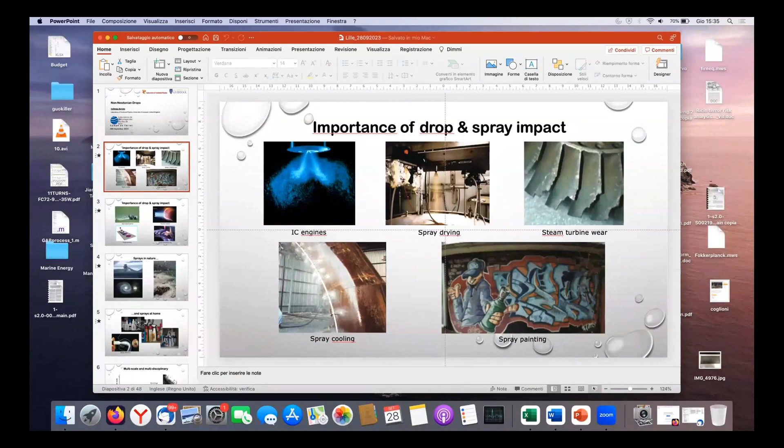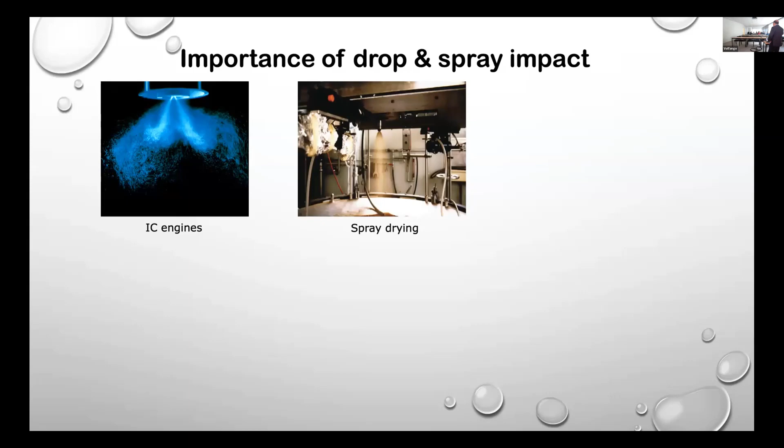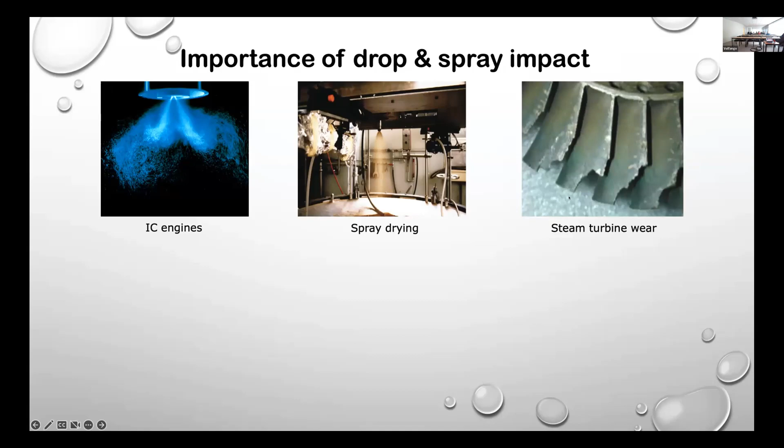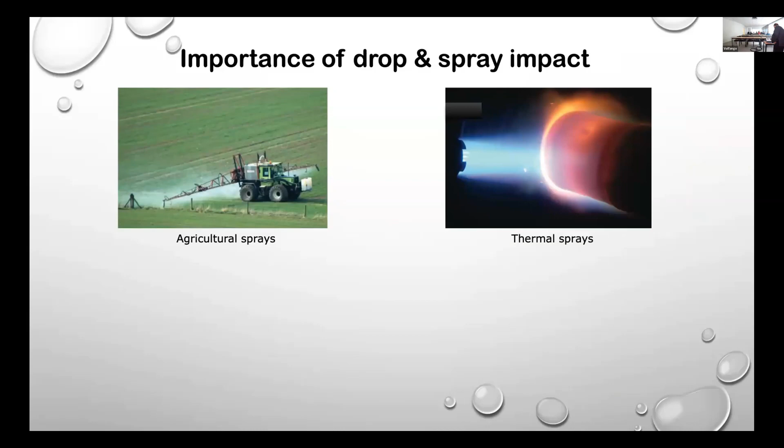That's okay, so to repeat: drops and sprays are important in our everyday life. We have internal combustion engines. Food, most of the processed food, at some point in the production process involves spray drying to make powders. If you know a bit about turbo machinery, this is the effect of droplets impinging on the blades of a steam turbine. We have spray cooling, spray painting, more or less desirable. Sprays are extremely important in agriculture for the distribution of agrochemicals on crops. We have thermal sprays, and of course we all know the importance of inkjet printing and inkjet manufacturing today.

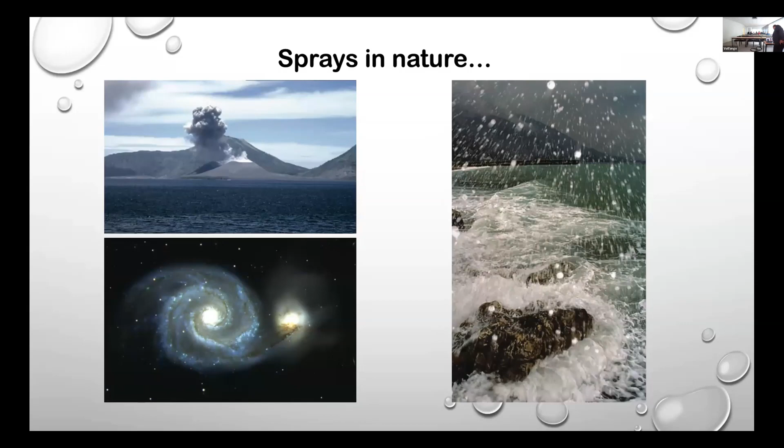Sprays are common in nature. Think of the eruption of a volcano, or the foam generated by waves that hit cliffs, but they are also in the universe. Very often, the dynamics of galaxies can be modeled using hydrodynamic models, and very often they release droplets as they break large amounts of cosmic matter. They become more or less like liquid jets. We have a lot of sprays at home, including medical sprays when we are sick, for drug delivery.

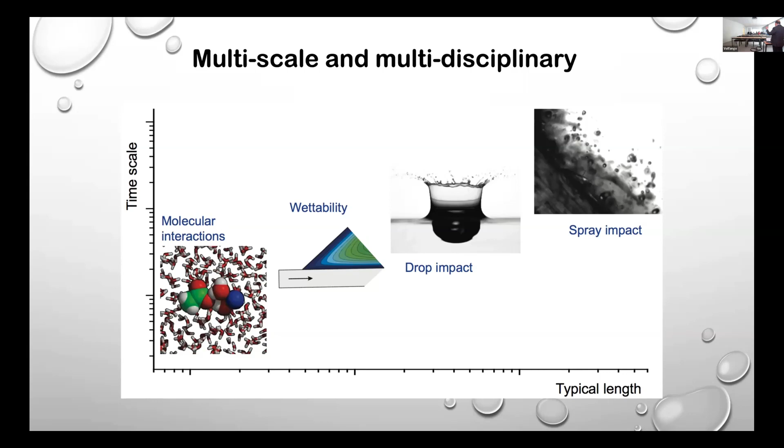One of the beauties of studying these things is that we can span over large ranges of length scales and time scales. We go from molecular dynamic simulations at molecular scales, to somewhat larger scales when we study fluid dynamic singularities, such as the problem of the contact line and the contact angle in wetting. We can go to millimetric scales and millisecond time scales when we study drop impact phenomena, and use even larger scales when we study sprays, which result from a combination of a large number of droplets.

So how about drop impact in general? Imagine a droplet that hits a solid surface, a solid target. The first thing that happens is an inertial spreading stage: the droplet, which initially is spherical, impacts the surface and spreads more or less like a disk. In reality, there is a very thin layer, called a lamella, surrounded by a toroidal rim. This stage lasts for about 5 milliseconds.

The second stage of drop impact can have different outcomes depending on the conditions, first of all, of the substrate - its roughness, wettability, porosity. The second important parameter is the impact kinetic energy, or better, the ratio between the impact kinetic energy and the surface energy, which is expressed by the Weber number.

So, roughly speaking, we can have 3 cases. One case where the droplet just sits on the surface. One case where the droplet bounces off the surface. And when the impact kinetic energy is very large compared to the surface forces, we have this case here, which is called splashing, where the droplet breaks down into smaller satellite droplets.

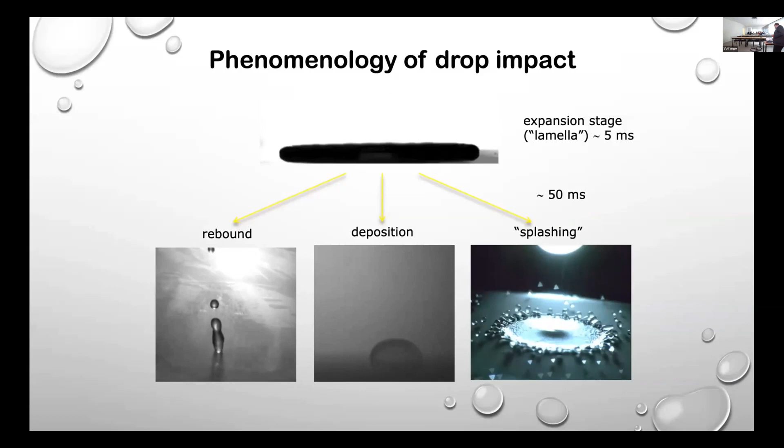How can we understand this in very simple terms? Well, the ground zero of any mathematical modeling is identifying the appropriate dimensionless numbers.

So the simplest model of drop impact can be a spring dashpot system, where the elasticity of the spring is represented by the surface tension, because as we increase the free surface, for example when the droplet spreads on the surface, we increase the surface energy, which is proportional to the area. And of course, damping, viscous dissipation, is represented by viscosity.

So if the recoil velocity is slow, the drop will just sit on the surface and take the shape of a spherical cap. If the recoil velocity is very fast, there will be enough energy for rebound, roughly speaking.

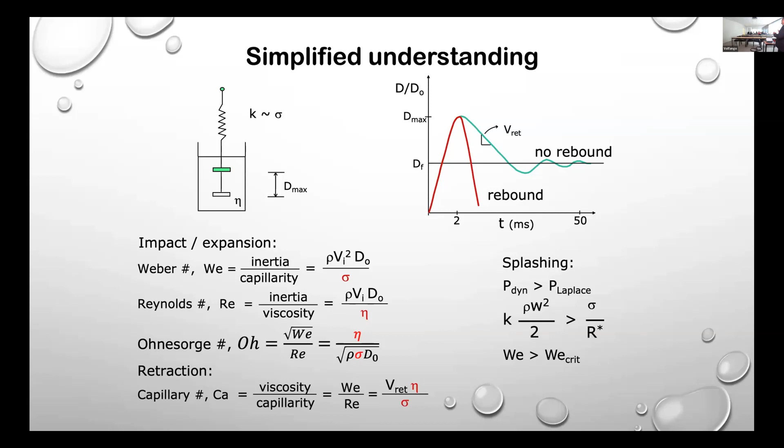We find that splashing occurs when the Weber number exceeds a critical threshold. And if you look into the literature, you will see that, with some coefficients, the correlations to determine the point of splashing are all based on the Weber number or combinations of the Weber number and the Reynolds number. So even if we use very simple tools, we can understand more or less the trends of what is going on.

There is something even more interesting when we have the impact of droplets on a heated surface. So far we have seen the three basic outcomes of drop impact: deposition, rebound, and breakup. These also happen on a heated surface, but on a heated surface there is something more.

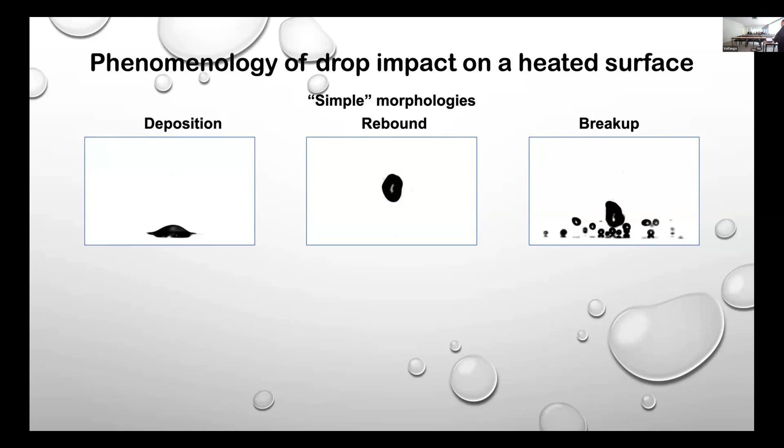Because if the surface temperature is higher than the boiling point of the fluid, we have secondary atomization. We will see in a minute where the secondary atomization comes from. However, this can be superimposed on the basic outcomes, deposition, rebound, and breakup. So we'll have deposition with secondary atomization, rebound with secondary atomization, and breakup with secondary atomization.

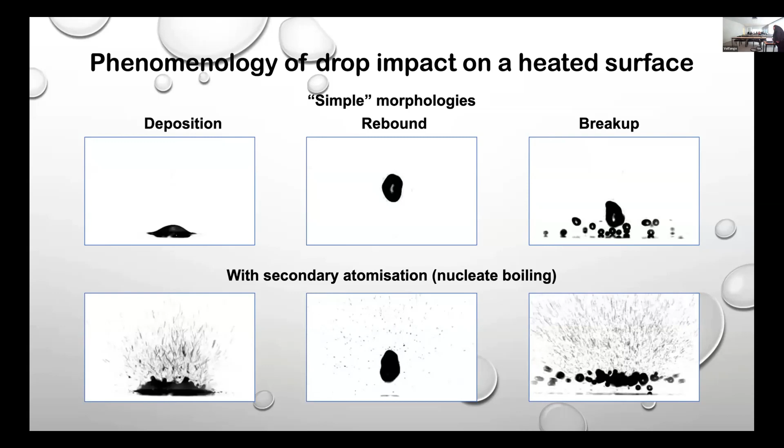Empirically, we can work out some maps that tell us where these impact outcomes happen, depending on the impact Weber number and the surface temperature. So for example, dry rebound without any secondary atomization typically happens for low Weber numbers and high temperatures, while if we go to higher Weber number, we will have drop breakup, with or without secondary atomization.

The origin of secondary atomization is essentially due to boiling, to nucleate boiling. So when we have the droplet on a heated surface, if the liquid is everywhere in contact with the surface and the temperature is above the boiling point, we will have nucleate boiling.

Note that this can happen even in the case of Leidenfrost or semi-Leidenfrost droplets, when there is a vapor cushion that separates the liquid and the surface, because this vapor cushion, this vapor film, may be unstable.

If locally the liquid of the droplet touches the surface, even for a very short time, we can have nucleation. What happens is that these bubbles generated at the contact between the liquid and the surface rapidly go up by buoyancy, reach the free surface, and burst. In bursting, they generate satellite droplets of secondary atomization, and these can be more or less strong depending on the impact Weber number, the surface temperature, and so on.

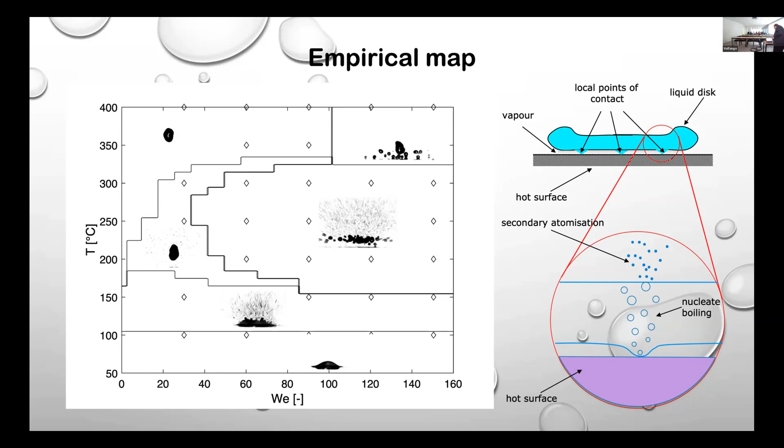This is just an introduction to what we can expect to see when we have the impact of drops, any drops. But now we want to introduce non-Newtonian drops. And first of all, we want to remind ourselves what a non-Newtonian fluid is.

As opposed to a Newtonian fluid, a Newtonian fluid is one for which the relationship between the stress tensor and the deformation rate tensor, or velocity gradient tensor, is linear - an equation of this form. Anything else is non-Newtonian. So in a non-Newtonian fluid, the stress tensor can be a function of the deformation rate tensor, of its derivatives of any order, of the position and time. So you see that it can be very complicated.

We use to think of non-Newtonian fluids in terms of the constitutive model that describes these Newtonian fluids. However, I want to recall a simple fact: there is no direct correspondence between a constitutive model and a real fluid.

Because what happens usually is the following: we have a certain fluid that does not behave like water or air. So we start to think about it. The first thing we do is we observe directly, eventually with the help of instrumentation - either rheometers or microscopic analysis - of the flow structure under flow. Then we produce a mathematical model which results into our constitutive model. And you see that the weak point is here, because the mathematical model can be more or less accurate.

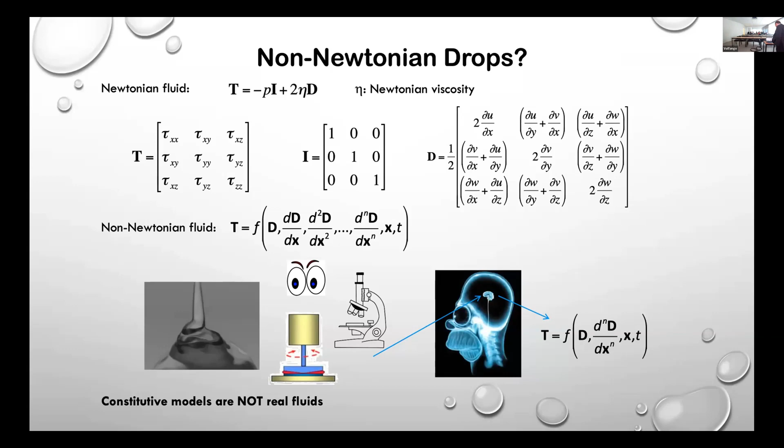So we have to keep in mind that the constitutive model does not correspond to a real fluid. Another thing we should bear in mind is we normally talk about non-Newtonian fluid, but the non-Newtonian behavior appears only when we apply a shear or a force to the fluid - so when we have a flow. So the attribute non-Newtonian is for the flow, not for the fluid. We should talk about non-Newtonian flows, not non-Newtonian fluids. But just to be very picky.

We normally sort non-Newtonian fluids, or flows, into time independent and time dependent. Time independent can be the power law type fluids, so shear thinning, shear thickening. An important class is that of viscoplastic or yield stress fluids, and we have plenty of examples in the kitchen and bathroom of these fluids. And then the trickier fluids to deal with are the time dependent, the so-called viscoelastic in particular, which require a very complicated constitutive model, which brings complications into the numerical modeling.

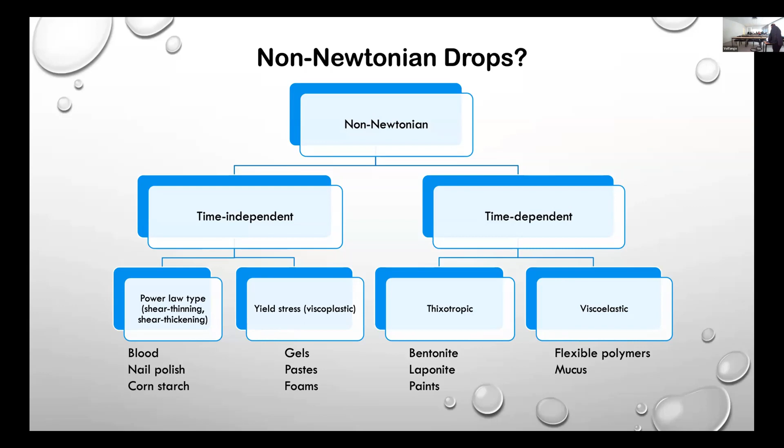So I will try in the rest of my talk to follow more or less this classification and present non-Newtonian drops belonging to these four categories I have displayed at the bottom. I will start with the impact of viscoelastic drops on hydrophobic surfaces.

In particular, I am talking about dilute polymer solutions. Dilute polymer solutions are a very common fluid in solution. Below the overlap concentration, the shear viscosity remains low - it can be 30 to 50% higher than the viscosity of the solvent, but it is not very high. So for example, if we have a spray generator, a nozzle, we can easily replace a solvent with a polymer solution without having to change either the pumping system or the nozzle.

Interest in drops of dilute polymer solution dates back about 25 years, for the distribution of agrochemicals. Here we have two examples of drop impact: on the left, pure water; on the right, 100 parts per million polyethylene oxide solution with a very large molecular mass of 4 million. On the same surface with the same Weber number, the water drop rebounds while the polymer solution drop sticks to the surface.

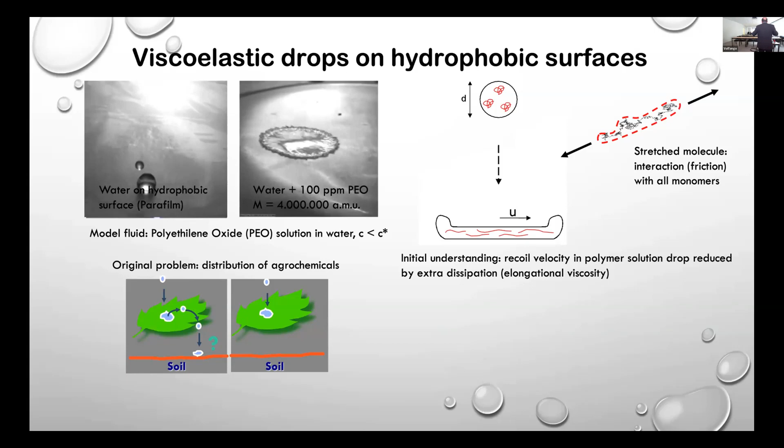This was quite curious and hard to explain. The first mechanism proposed was that during drop impact, you get large velocity gradients in the droplet parallel to the surface, which can stretch the polymer molecules. Polymer molecules at rest are coiled to maximize conformational entropy, but with large velocity gradients, a linear chain will unfold.

In a coiled molecule, the interaction between fluid and monomers occurs only on the surface of the sphere-like coil. If we stretch the chain, interactions occur with all monomers along the chain, increasing friction. This is traditionally represented using elongational viscosity, the ratio between the first normal stress difference and the elongation gradient, usually given as a multiple of shear viscosity. This coefficient is called the Trouton ratio, which for a Newtonian fluid is exactly 3, since the only normal stress is pressure. In a polymer solution it can be 3 orders of magnitude higher.

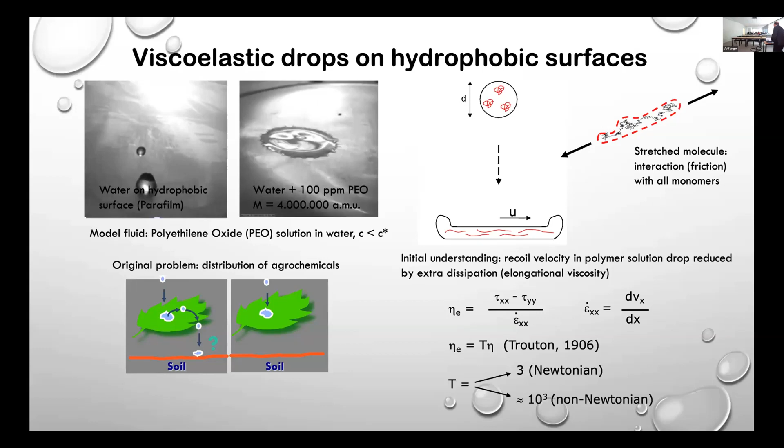So, dissipation — there were quite a lot of studies investigating these correlations. Boger's group in Australia did many transient elongational viscosity measurements for different fluids. These measurements are tricky and the error bars are quite large. However, they managed to correlate clearly both the recoil velocity of polymer solution drops and the rebound height with the Trouton ratio, i.e. the elongational viscosity. At some point, the bouncing height becomes zero if the elongational viscosity is high enough.

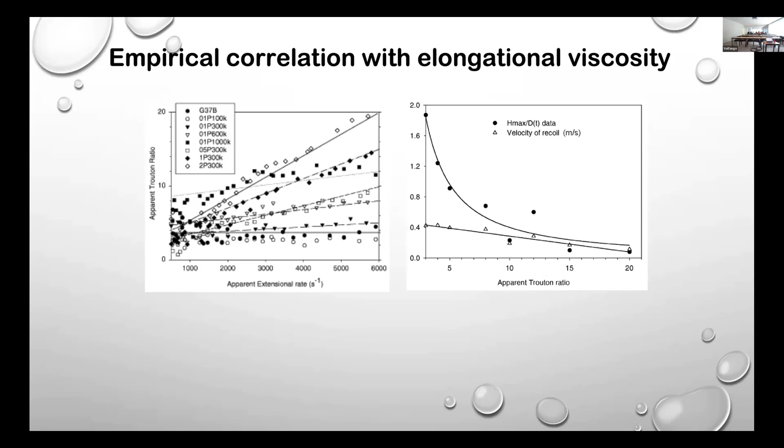They also took high-speed images. Here you can see clearly that as you increase the molecular weight of the polymer, increasing the relaxation time and the elongational viscosity, at some point the drop does not bounce anymore. So, all good.

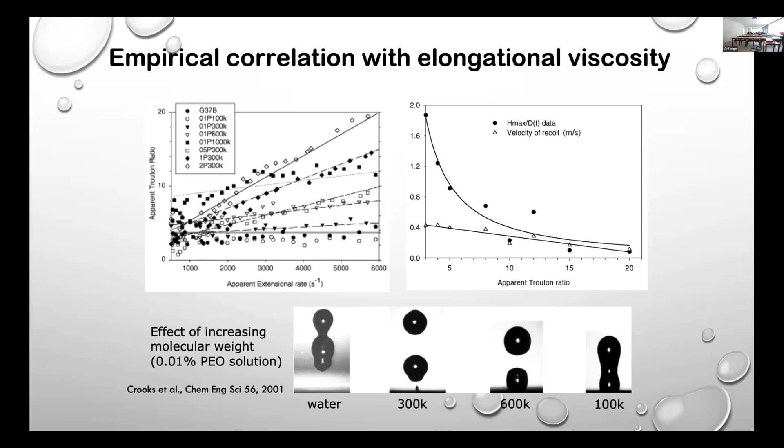Unfortunately not — the fact that two phenomena are correlated, appearing simultaneously, does not mean there is a cause-effect relationship between them. In fact, there were a few issues with the elongational viscosity explanation. The first issue was highlighted by experiments done in Marne-la-Vallée in the group of Michèle Vignes-Adler.

She studied the impact of polymer solution drops on very small targets. These are images viewed from above: the white spot is the small target, and the film around it is the spreading disk of the droplet. They measured the spreading ratio, the diameter divided by the initial diameter of the droplet, versus time, and found that water and polymer solutions have exactly the same spreading ratio over time. So, water has no elongational viscosity, while the polymer drops do have a large elongational viscosity — so probably it's not the elongational viscosity.

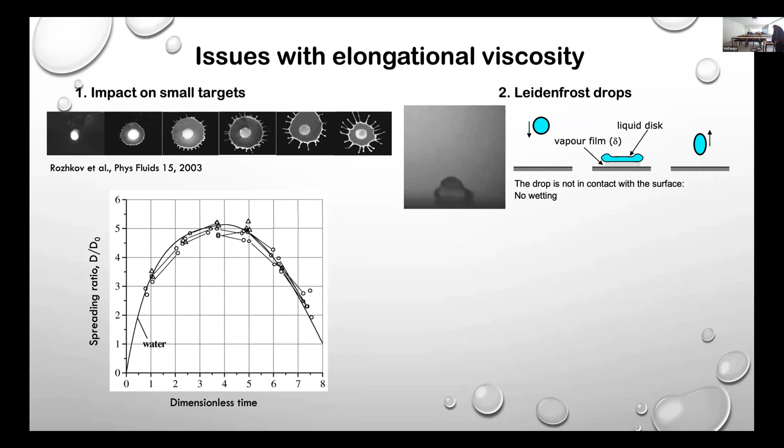There are other experiments that go against this interpretation, done on Leidenfrost droplets — the case where the droplet does not touch the wall because there is a vapor film in between. Essentially, if the surface temperature is sufficiently high, the vapor film forms almost instantaneously, so the liquid is never in contact with the surface.

Comparing water drops and polymer solution drops impacting a heated surface, in these figures the open symbols are water and the filled symbols are the polymer. The maximum spreading diameter is slightly smaller for the polymer solutions — makes sense since they are a bit more viscous. But then the bouncing height, especially at high Weber number, is the other way around: the polymer drops bounce higher than the water drops. If we assume the bouncing height is due to elastic energy stored by the polymer, we have a problem with energy conservation — that's the only possible answer.

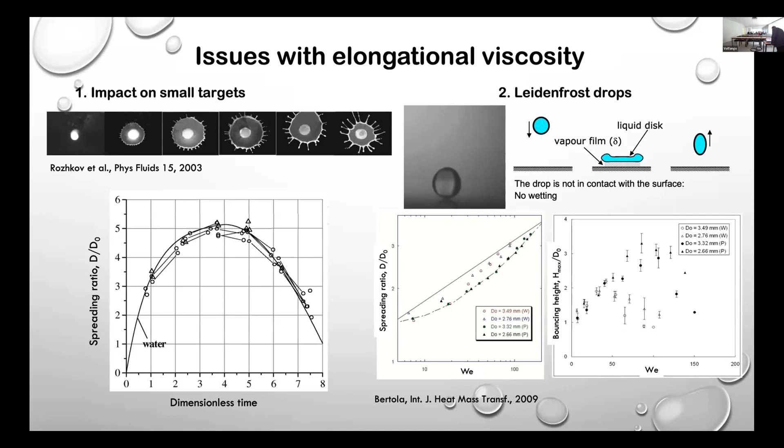So there was another issue with the elongational viscosity, which came from an infamous lab in Paris. The problem was that the elongational viscosity measurements used to propose the interpretation of the absence of rebound in terms of elongational viscosity...

were these. So the graph on the left was the first paper to talk about the anti-rebound effect of a polymer solution. A few years later, the same group republished the same data for another purpose. If you read the caption, you see they are exactly the same fluids, done with the same molecular weights, the same concentrations, etc.

And if you put the two graphs one over the other, you see they do not overlap. You see this point, the distance is not large - it's because it's a logarithmic scale.

If we plot one measurement versus the other, we see that the points that are not aligned have a difference of 100%, so a factor of 2. And they are only on one side.

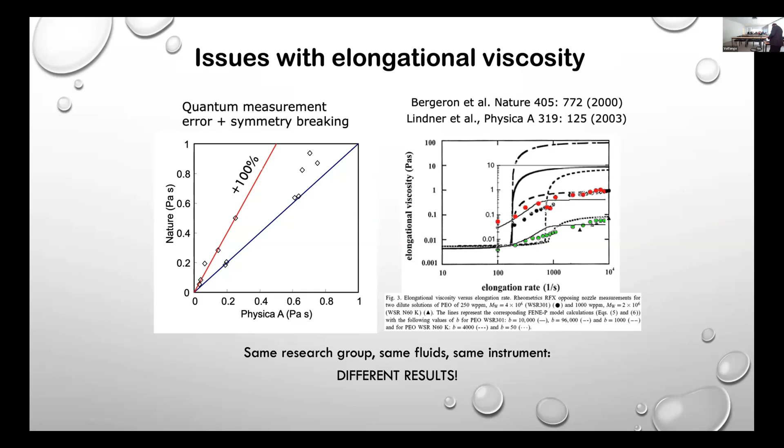So if it was an accidental random measurement error, I would expect them to be distributed on either side. So here there is everything that makes a physicist happy: quantum measurement error - is it 0 or 1? And symmetry breaking, because it's going on one side. So overall, there was something strange.

What we did then to try and understand what was going on, we decided to measure the velocity field inside the droplet, because that's the only way to understand whether you have sufficient velocity gradients - when you have the velocity field with respect to time, you also have the velocity gradient. To do so, we used a quite weird setup.

We had an inverted microscope to visualize the target of the droplet from below. We illuminated the field with a pulse laser at a certain frequency, and then we sampled the impact with a high-speed camera at 1/4 of the frequency of the laser.

So basically, if we seeded our liquid with a fluorescent particle, on each image of the camera, we would visualize the same particle 4 times, so we could follow it along the trajectory. Because for one frame, we would have 4 flashes of the laser illuminating it, and during that time, the particle would move, so we would see the same particle at 4 different positions.

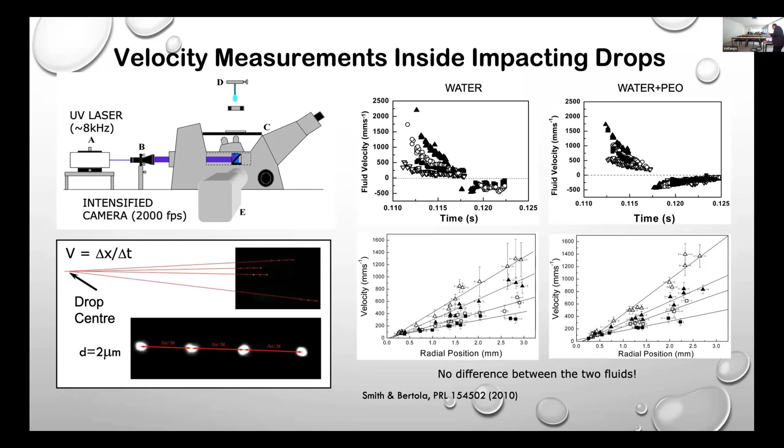We think it is because of the contact line. So in these 2 movies, we have again one water droplet on the left and the polymer solution droplet on the right. On the graph on top, the black points are the velocity of the fluid inside the droplet, and these 2 white points are the velocity of the contact line.

So it is the contact line that moves much slower in the polymer solution, while the rest of the fluid in the bulk is the same. So the question now becomes: is it elongational viscosity, or since it is the contact line that moves slower, is it just a problem of wetting, as suggested by the Leidenfrost experiments and the impacts on small targets?

Well, we can look at the contact angles. Again, water on the left, water plus polymer on the right. You do not need to measure the contact angle, you can just see with your eyes that the contact angle for the polymer solution is much smaller than the contact angle of the water drop. And so from this set of experiments altogether, we can quite confidently say that it is not a problem of rheology, of elongational viscosity, but it is a problem of wetting.

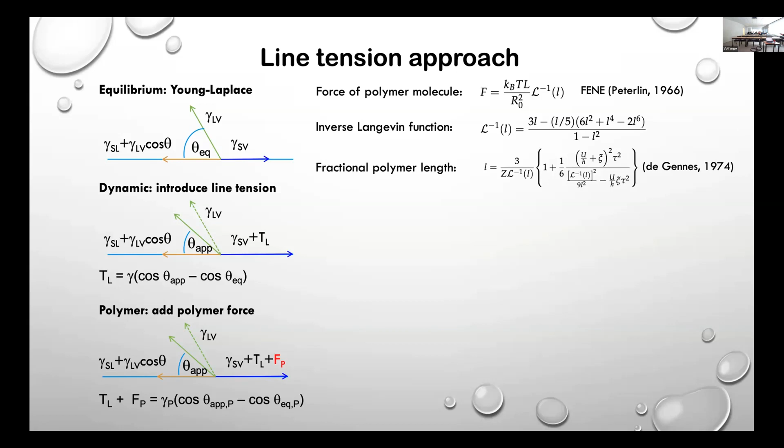It is a function of the fractional elongation of the polymer, which was calculated by de Gennes in the famous coil-stretch transition paper. It's a bit tricky because it's an implicit equation, but numerically we can solve it. Multiplying by the expected number of molecules, which depends on the polymer concentration in the droplet, we can calculate the force of the polymer per unit length, represented here normalized with respect to the surface tension of the liquid.

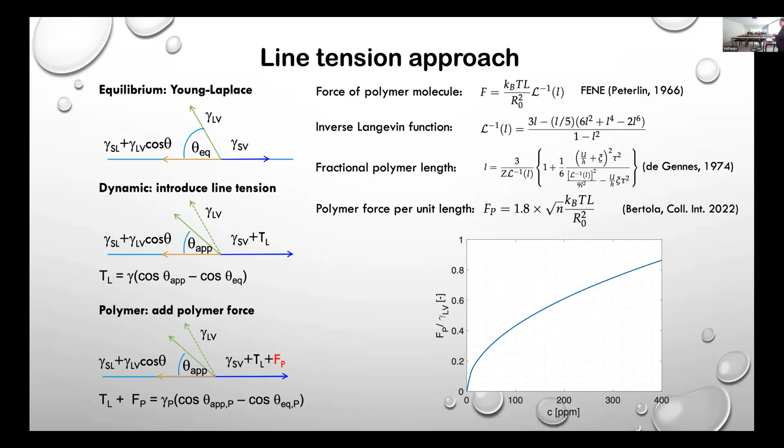We see that this polymer force is a significant fraction, I would say of the same order as the capillary force. So it is sufficient to delay or even stop the recoil of the droplet because it has the same magnitude as the capillary force. This provides a reasonable explanation for the behavior of droplets containing small amounts of polymers.

I want to show you now something quite amusing, which is the effect of these polymer additives on the impact of droplets on heated surfaces, because the morphologies are quite amusing. The first thing polymers do is that they prevent splashing.

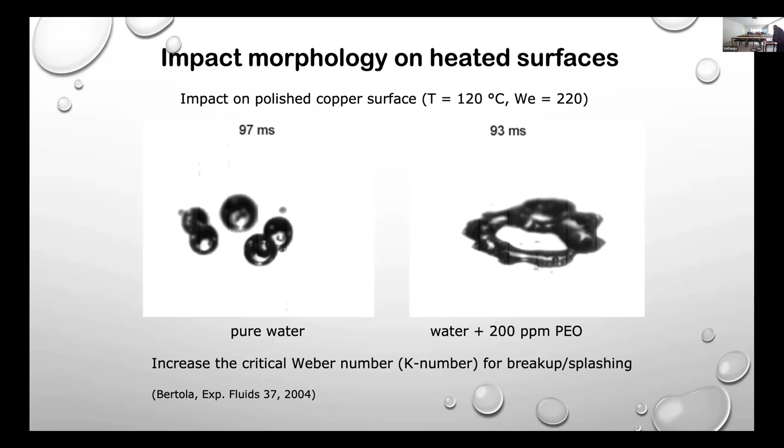On the left, you see a water droplet impacting on a certain surface with a certain Weber number. On the right, same impact condition, but with 200 parts per million of polymer, the first droplet breaks down, the second doesn't. So one conclusion we can say is polymers in small concentration can significantly increase the threshold Weber number for droplet breakdown. Can be useful.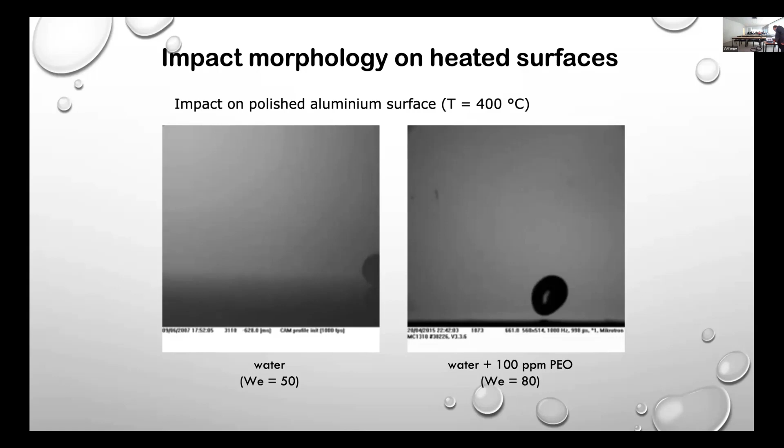They always change the morphology. Here we have a case of rebound with a single satellite droplet that goes away. If we repeat the experiment with the polymer solution, we see that satellite droplets tend to go, but then there is a filament that remains and pulls the satellite droplet back into the main drop.

Another thing polymers do is they suppress completely secondary atomization. On the left now we have the water droplet. It starts to boil, and when it does, you see satellite droplets going all around very quickly.

The polymer solution droplet will boil, and you will see some movement down. The quality of these movies is not great because they are very old. However, you can see on the right some boiling, but satellite droplets do not depart.

Imagine this is not a trivial problem for applications, because we had issues trying to inkjet print metals to make microelectronics, to make electronic interconnections. Metals are printed usually in suspension in an organometallic solvent, so the organic part evaporates upon deposition. But in order to evaporate quickly, they need to be printed on a heated surface.

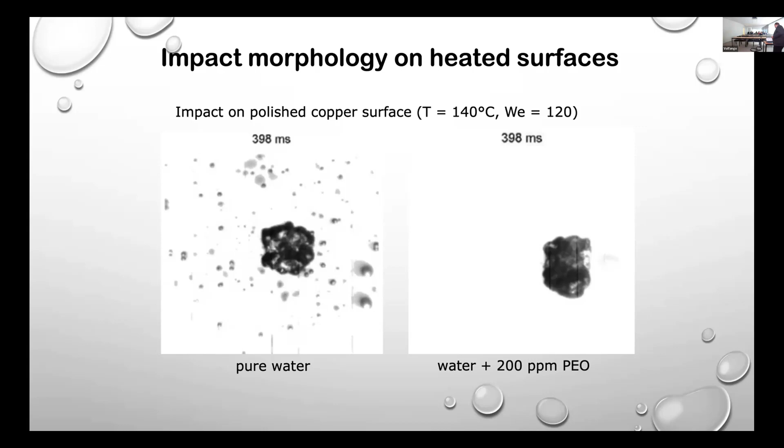So if you want to print a very fine track and you have secondary atomization, the metal will be distributed at a certain distance from the track, and the quality of that electrical connection will be very poor. It will not work. So this was very useful to address that issue.

We can see it even better here when we have secondary atomization upon impact. This is a Leidenfrost drop that bounces because of the vapor film, but before that, since the film is not stable, it sprays droplets. With the polymer, this doesn't happen - same condition, same surface temperature, the drop will just bounce off with no satellite droplets.

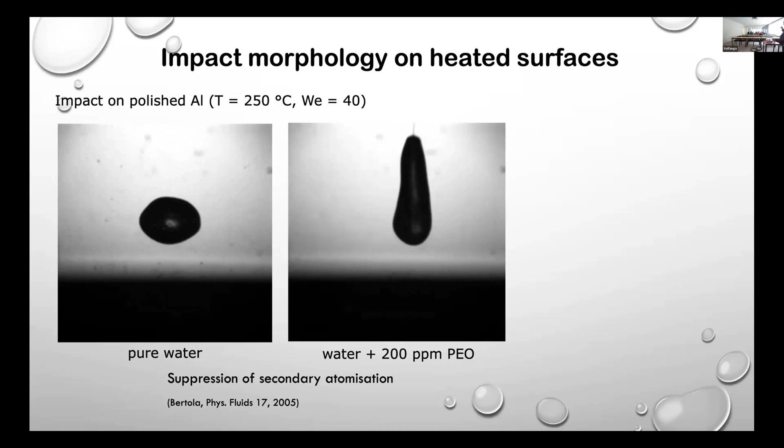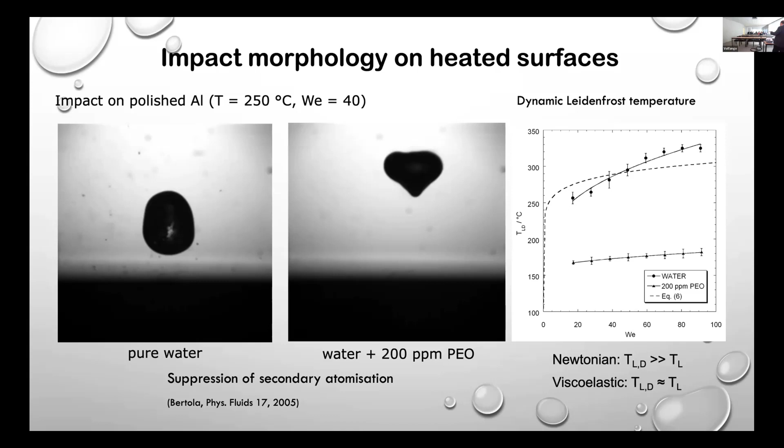So in quantitative terms, the Leidenfrost temperature for Newtonian fluids increases with the Weber number, because a higher Weber number pushes the vapor film down - it tends to become thinner, and so we will have contact between the liquid and the surface. If we have the polymer solution, the dynamic Leidenfrost temperature remains independent of the Weber number and almost identical to the static Leidenfrost temperature.

Other funny things - did you see anything in this movie? Probably not. If we isolate single frames, this is a case where the Newtonian drop would have secondary atomization. You see the satellite droplets here that tend to depart, but there is the liquid bridge that pulls them back. So that's how secondary atomization is suppressed in polymer solution droplets.

And again, do you see anything here? This is a droplet that in normal Newtonian conditions would splash, would break down. But analyzing the frames, you see the satellite droplets around the rim tend to leave, but there is always this liquid bridge that over time pulls back any loose droplets that want to break down.

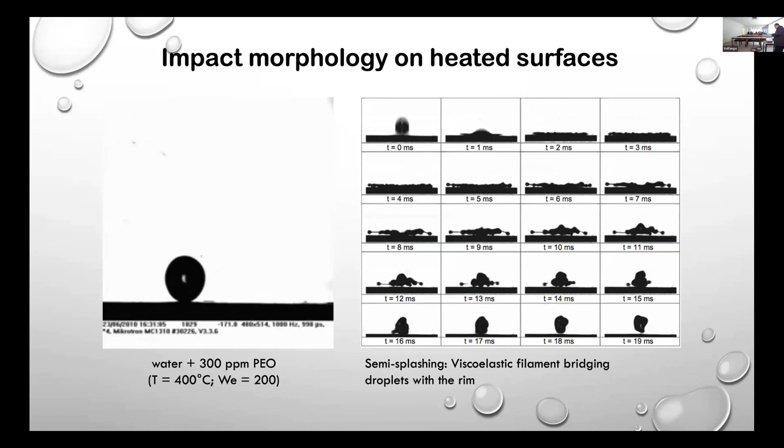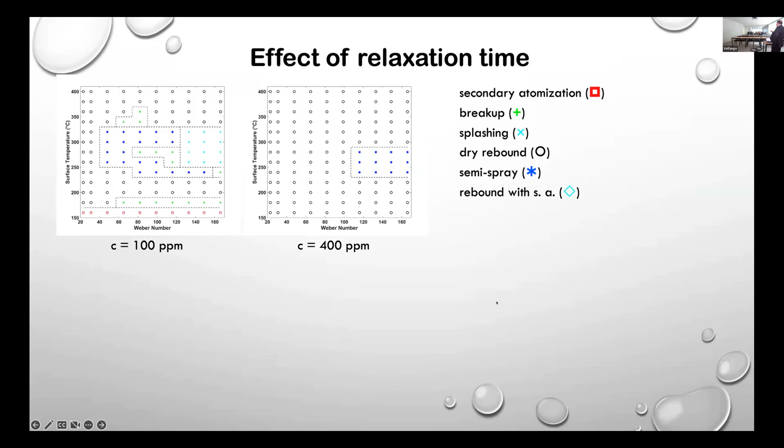So it is quite interesting, and you can put this together to study the effect of relaxation time. You can change the relaxation time either by increasing the concentration, like in this case, or by increasing the molecular weight of the polymer. And in either case, the result is always the same: breakup and secondary atomization are killed.

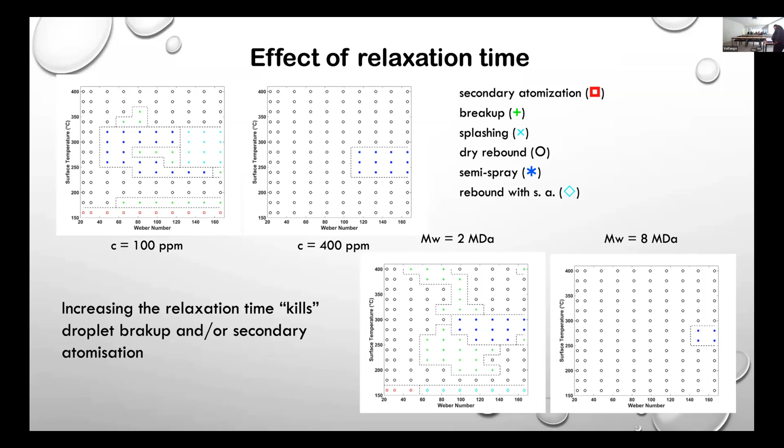So on the left maps, we have a variety of morphology. On the right, everything is suppressed, and you have either rebound or simple deposition. That's it. So this is the effect of polymers on droplets impacting a heated surface.

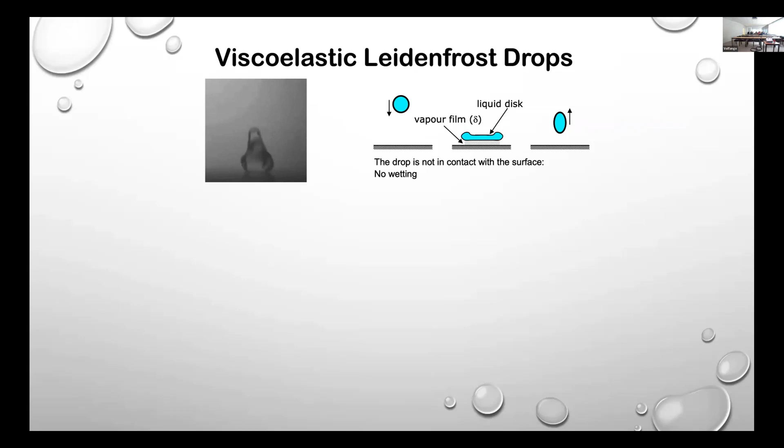Something a bit more interesting, that was just qualitative, is studying the problem of viscoelastic Leidenfrost droplets, because it helped us understand the impact and rebound on a hydrophobic surface. But there was still this issue with energy conservation that was not really sorted. So just to recall, the droplet of polymer spreads a bit less than the droplet of water. However, it rebounds higher. So where does this energy come from to bounce higher?

So we tried different fluids. We used water with a certain viscosity, an elastic polymer solution with a similar viscosity, and asked, what happens with a shear thinning fluid? The shear thinning fluid should spread more, right? And so bounce a bit less, because in spreading it would dissipate more. The result was the shear thinning fluid, despite having much higher shear viscosity, was bouncing higher than the other droplets, even the elastic droplet.

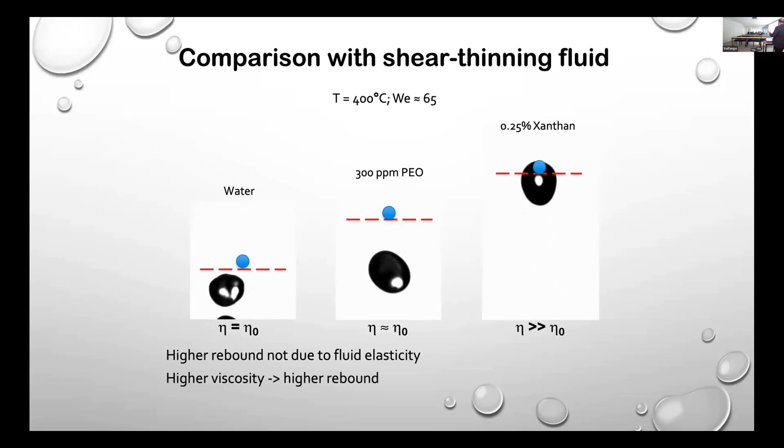So one droplet is elastic, I would expect it to bounce higher. The shear thinning droplet has no elasticity apart from that of the surface tension, and still goes higher. Measured systematically, you see that as the Weber number increases, for large impact kinetic energy, the shear thinning droplet rebounds 5 times higher than the water drop in the same conditions. So we thought the only way to understand what was going on was to create a system that was really comparable.

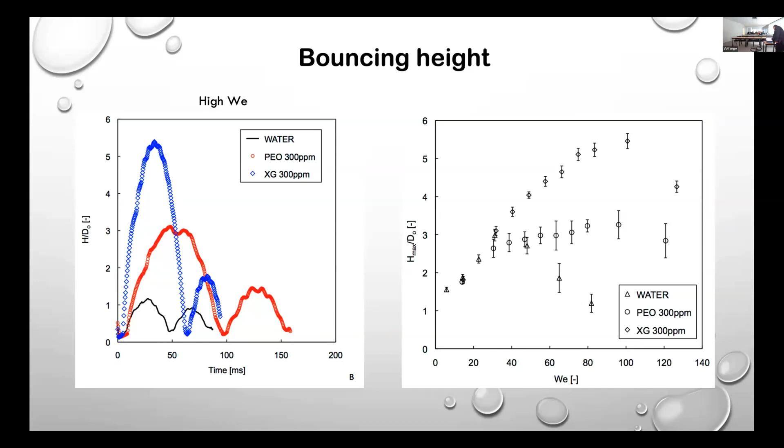So we built, by trial and error—and trial and error translated into about one year of errors—fluids with matching flow curves. We used xanthan, which is a known shear thinning fluid, so as we increase the shear rate, the apparent viscosity decreases. And then we matched this flow curve with a polyacrylamide solution, tuning the concentration very finely.

The polyacrylamide is a polymer that has both shear thinning and viscoelastic properties. With this system, we took glycerol solutions to match the infinite shear rate and zero shear rate viscosities of these flow curves, calculated using a Carreau-Yasuda model extrapolation. We repeated the measurements and saw that the bouncing height was more or less the same for all fluids except the Newtonian fluid with the infinite shear rate viscosity.

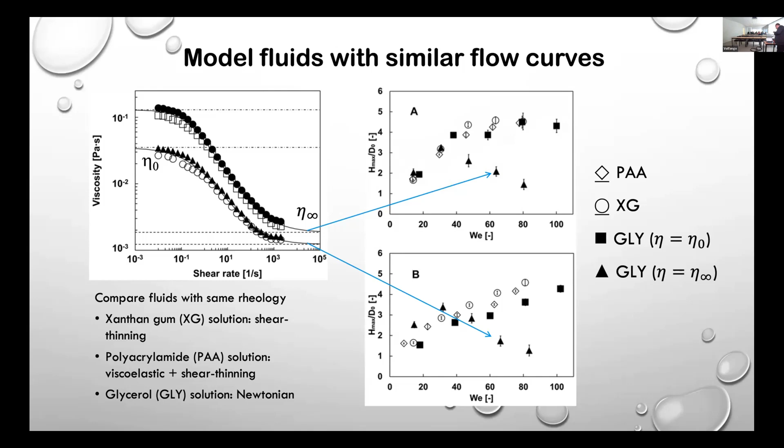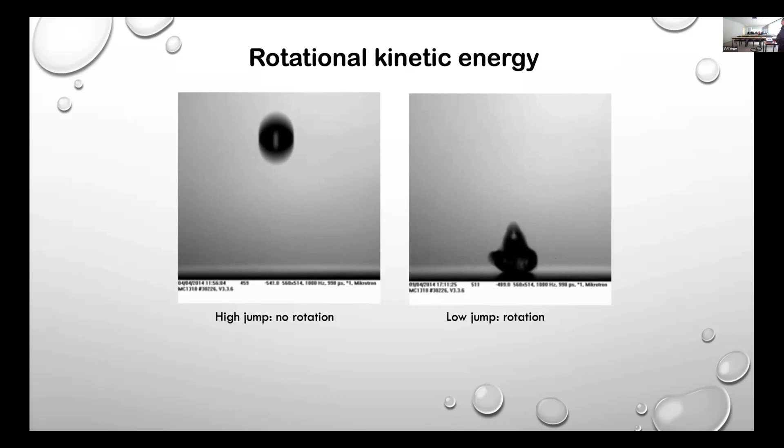So we started to restrict our focus, our area of investigation. And at the end, we found that the droplets that jump low, that do not jump high, rotate during the rebound, while the other droplets keep their symmetry and have no rotation. So we suspected it could be the kinetic energy lost or required by the rotation.

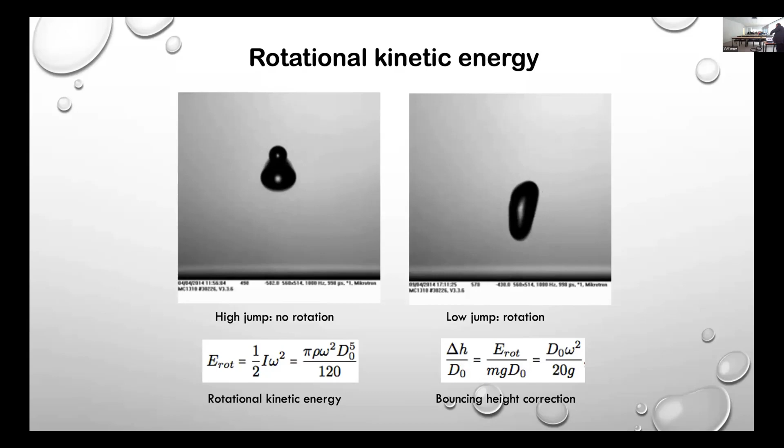So we made a very rough estimation of this kinetic energy. We assumed a shape of the droplet, for example a rod or an ellipsoid, to get the correct moment of inertia. Then we converted this energy into a height, into a potential energy, and corrected the charts of bouncing height with this extra height due to the kinetic energy.

And magic—the bad points, the triangles, which were much lower, started to agree with the other points. So we found that the reason for this difference in bouncing height was that the low viscosity droplets have this rotation.

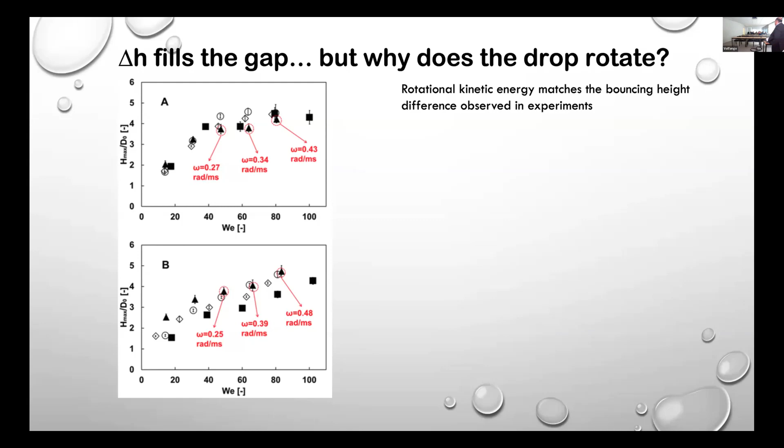The problem is exactly in recoiling, because we all know that when we have a disk under compression, we have instabilities. The same happens to the droplet. Therefore, due to this instability, two or more of these satellite droplets may coalesce. In coalescing, they break the cylindrical symmetry of the droplet and change the mass distribution.

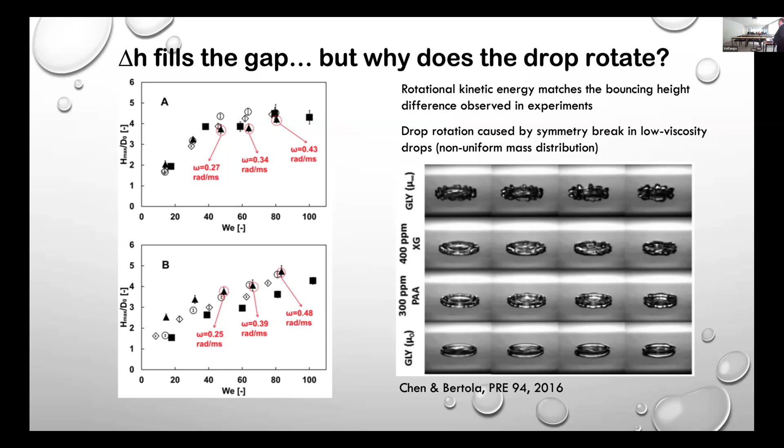So the mass distribution is no longer homogeneous in the disk, but there are some points where there is more liquid and some other points where there is less liquid. And this is sufficient to create the moment of inertia when the droplets take off and leave the surface. And so that's more or less everything.

But there are other interesting droplets that have non-Newtonian properties, for example the viscoplastic droplets. These droplets, for low applied stresses, behave like solids, and above a certain threshold of stress start to flow. The first thing we noticed is that when we tried to generate them from a needle or a nozzle, they were not spherical, except when the yield stress was very low.

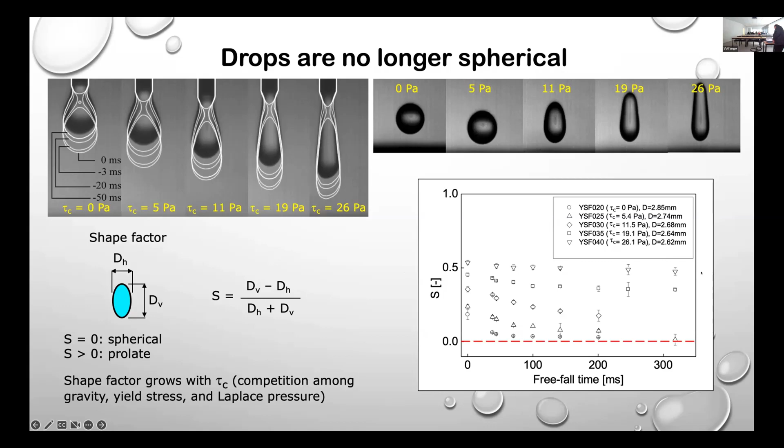So we characterize it with a geometric parameter. If this parameter is 0, the drop is spherical. If it is larger than 0, it's not. We measured it for droplets during free fall to see if they recalled the droplet to the spherical shape. Above a certain value of the yield stress, the drop remained prolate forever. But we introduce a number to characterize it, which is the product of the capillary number and the Bingham number.

The idea is when we have a droplet of a yield stress fluid, we have two forces in competition: the capillary force, or the Laplace pressure, and the yield stress. If the capillary force is larger, or significantly larger, than the yield stress, then we can deform the droplet. If the yield stress exceeds the Laplace pressure, the droplet cannot be deformed and behaves like a solid.

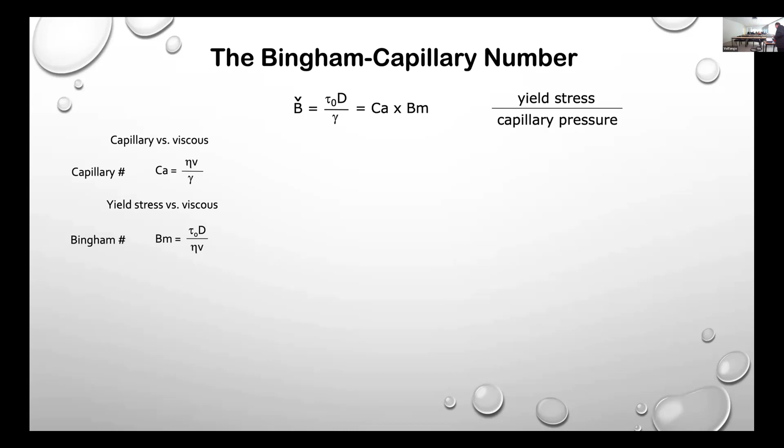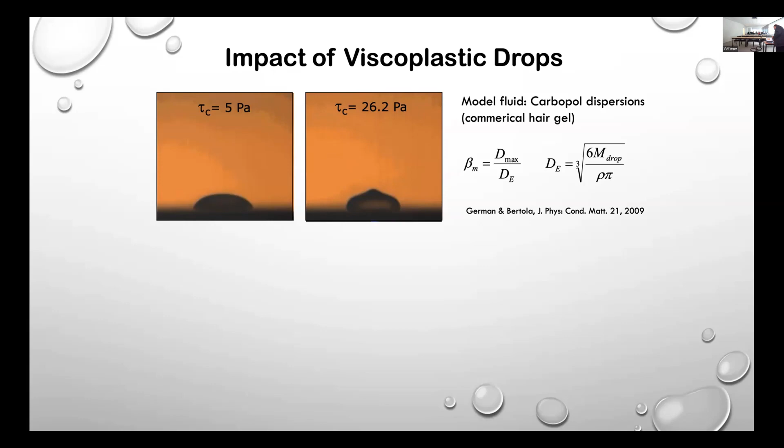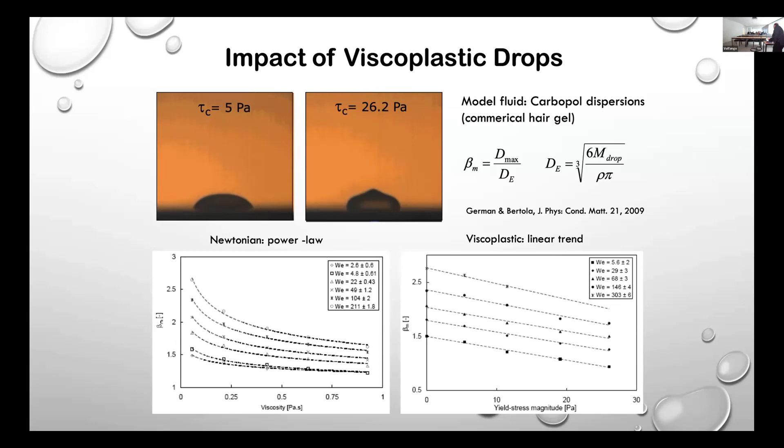Another interesting feature, en passant, is that the spreading ratio, the maximum spreading diameter, changes with viscosity. If we increase the viscosity of a droplet, the maximum spreading diameter reduces because of viscous dissipation. But in Newtonian drops, it reduces as a power law. In yield stress drops, it reduces linearly. I have no idea why, just an experimental observation.

Of course, you can play both with the yield stress of the fluid and with the Weber number. So depending on the Weber number and the yield stress, you can have a range of final shapes of the drop, which can be useful in manufacturing to create patterns on the surface. This could be, for example, with the appropriate nozzle and appropriate inkjet printer, an easy way to fabricate superhydrophobic surfaces.

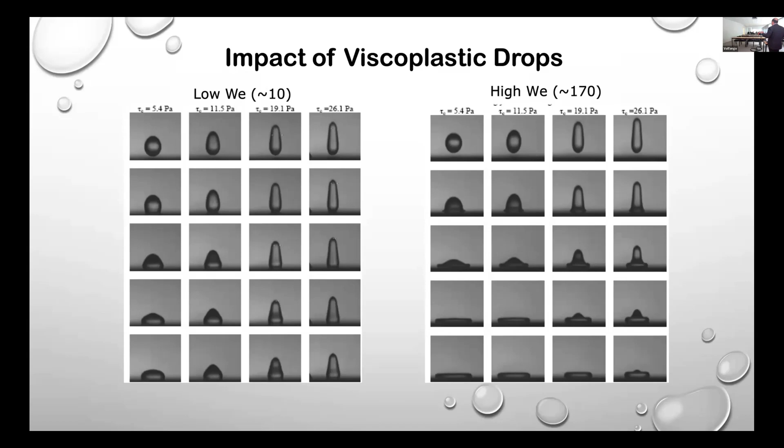When we have a bit higher yield stress, we have just a plastic deformation and virtually no rebound. Again, the capillary force cannot recall the spherical shape. Because of that, we have disk-like droplets, or a pancake, on the surface. And again, it is very well characterized by the Bingham capillary number.

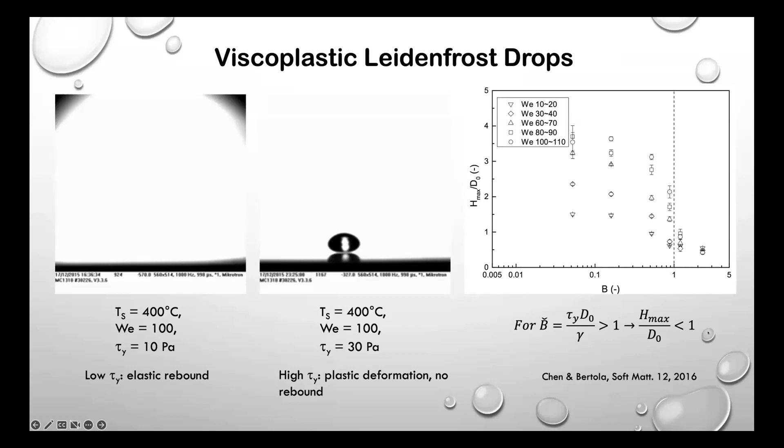Something even more complicated is the impact of a viscoplastic drop on a viscoplastic surface. This is interesting for inkjet printing because when we add a layer of material on the previous layer, it's the same material, but partially cured or dried, so it is a bit harder. So we wanted to understand what happened to the droplet on this surface, how the fluid in the droplet would diffuse and merge with the material of the substrate.

These experiments are a bit tricky because you have a change of refraction index when the droplet penetrates into the viscoplastic liquid. And you have the layer of material of the droplet that is distributed on the surface of the crater that is created by the drop penetrating into the gel.

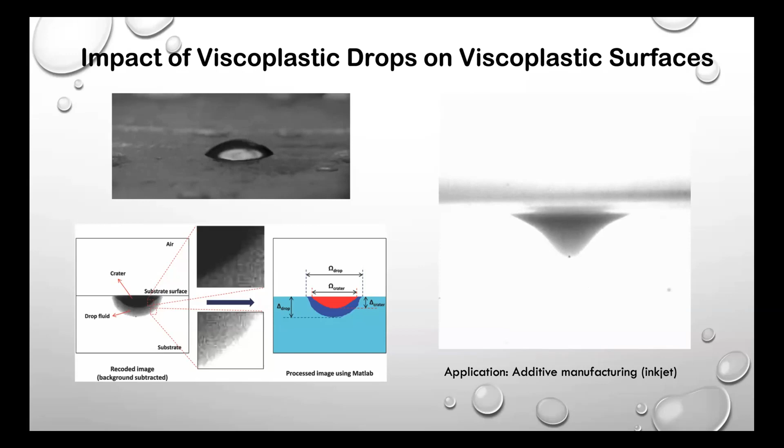The distribution of this material changes depending on the condition. We studied this using a more or less complicated digital image processing method, which allowed us to distinguish the substrate, the drop fluid, and the crater, the empty space. We changed both the yield stress of the droplet and the yield stress of the surface.

An interesting thing we noticed is that on harder surfaces, with tougher yield stress, the drop tends to penetrate more deeply as we increase the Weber number, which makes sense. However, when the surface is softer, with lower yield stress, the droplets tend to spread more as we increase the Weber number. So the material tends to stay on the surface instead of penetrating deeply.

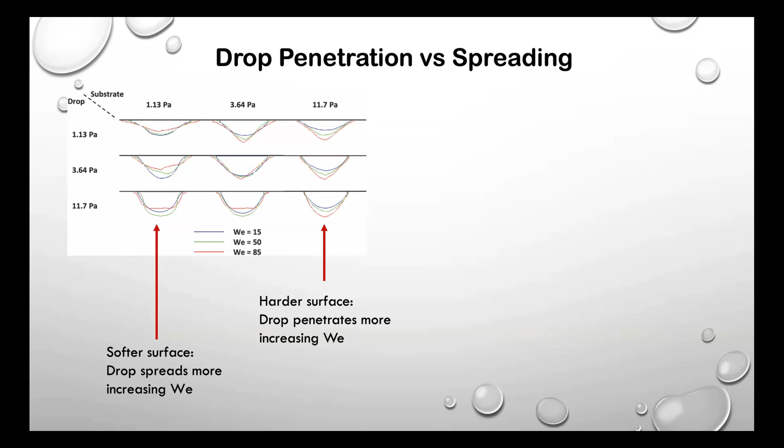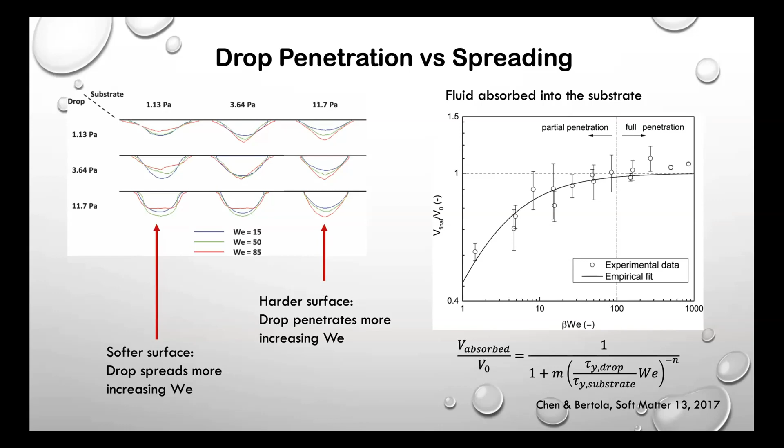We could work out a correlation. We found that in some cases the droplet is fully absorbed by the surface, so the crater disappears, the surface is flat, and all the droplet has been incorporated into the substrate. In other conditions, depending both on the Weber number and the ratio of yield stress between the droplet and the surface, only part of the droplet is absorbed and remains below the surface, while the rest forms a bump over the surface.

This is just out of curiosity. I want to finish with a very interesting fluid, which unfortunately is not well studied because it is difficult to deal with. This is a shear thickening fluid, or better, a jamming fluid, made of a concentrated suspension of particles. Here we use a model system of very small particles, 600 nanometers in diameter, which behave more or less like hard spheres.

We used a concentration of around 60%, which is close to the maximum random packing concentration of particles in a given space. And we used a solvent with a very high boiling point, so we ensured there was no evaporation under ambient conditions.

The behavior of this suspension is bizarre because it looks like a liquid, the surface is glossy, so it has liquid-like behavior. But under large deformation gradients, large velocity gradients, like in uniaxial extension, it becomes brittle. It is strongly shear thickening, you could say it is jamming. The particles are blocked in a cage with respect to one another, so there cannot be continuous deformation like in a fluid.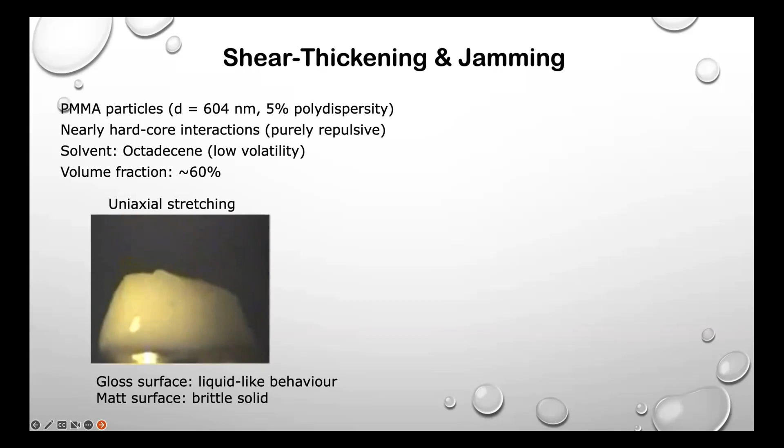The flow curve is also interesting. It is a shear thickening fluid, but if we model it with a power law, we see that it is broken into two branches. The lower branch is when the fluid behaves like a liquid, and the upper branch is when it behaves like a solid. So we have a very large increase of shear stress when we increase the shear rate by only a small amount.

So how do these droplets behave? When they impact a hydrophilic target, like glass, no matter the Weber number, instead of spreading upon impact, they remain jammed, they block, because there is a large rate of deformation upon impact, so the particles jam and we do not have inertial spreading.

If we plot the base diameter versus time, where we should see maximum spreading after 5 milliseconds, we see that the base diameter has remained the same. Then, because of capillarity, the droplets slowly start to spread, and the base diameter grows.

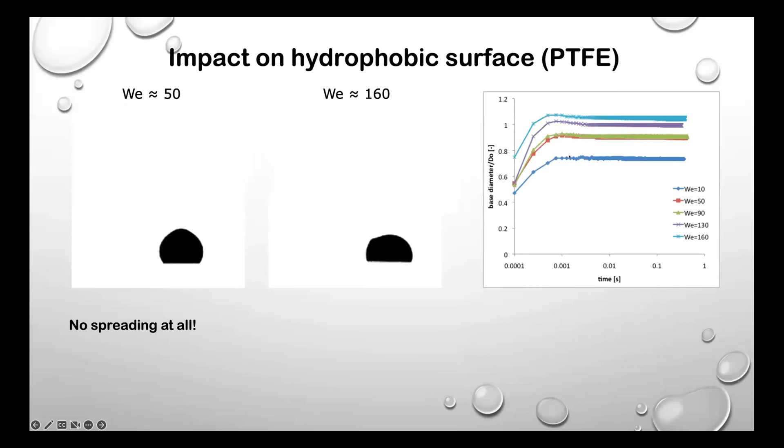If we repeat the experiment on a hydrophobic surface, there is still jamming. The drop remains blocked. The shape tends to rearrange and become spherical with time, but the base diameter does not change, it remains constant. And when I say constant, I really mean constant, because a few weeks later, the drops are still there.

We even released one drop on top of another, just to see, and weeks later they had kept the same shape. They had not spread, they had not deformed. So we believe this is due to the fact that once the system is jammed, you need some action in order to dejam it. In the case of the hydrophilic surface, this action is due to capillarity.

So the solvent will tend to wet the surface, so it will tend to move. In doing so, it will push some particles, just a few particles, out of their position, and this is enough to give the onset of a kind of cascade, a kind of avalanche that releases all the other particles that were frozen, that were jammed, and enable spreading.

If the solvent is not allowed to spread because the surface is hydrophobic, there is nothing that can dejam the system, that can pull the particles out of their position. And that's why the system stays permanently in this state. However, this requires some further investigation.

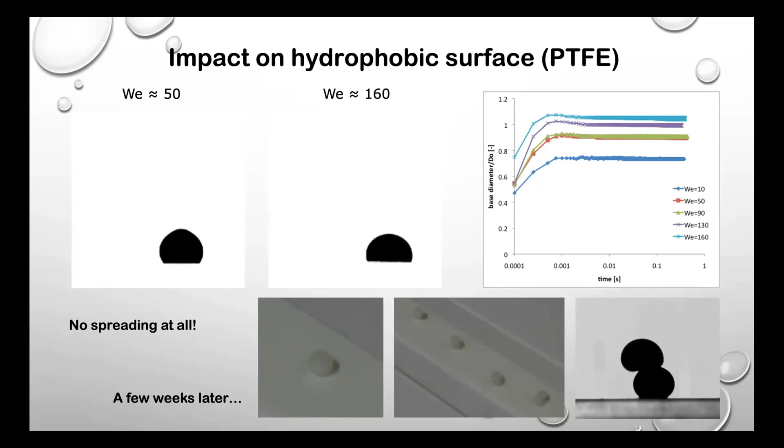So thank you, Volfango, for the very interesting and detailed talk. I would say let's see if there are questions in the room. I don't see the camera, so you can tell me if there are some people in the room who want to ask a question.

You didn't mention temperature in your explanation. I assume that when you had the problem of wetting with the contact line, temperature probably plays a role in some way. For example, when you said the polymer and the capillary force are the same order, is it for any temperature?

Yes, I didn't mention the temperature because all the study is on homo-thermal temperatures, that problem is only at ambient temperature. So surface and droplet at the same temperature. On a heated surface, I have no idea.

So on a heated surface, there is another issue. You can have pyrolysis of the polymer.

If it's homogeneous temperature, as you said, if you change the temperature a lot without going to extremes, is it the same? Does this temperature have a small effect?

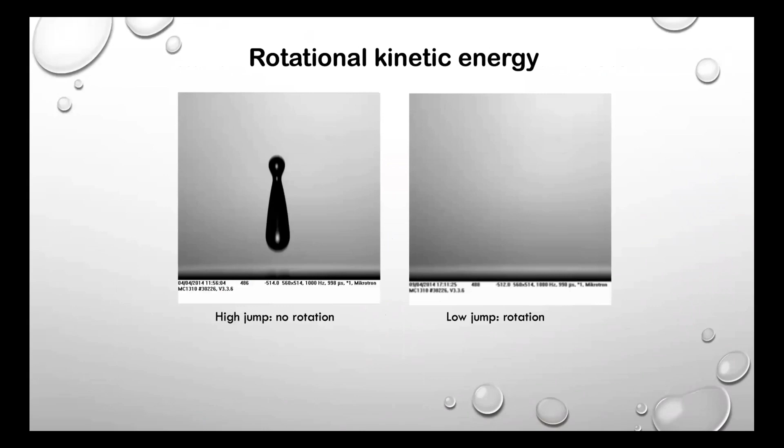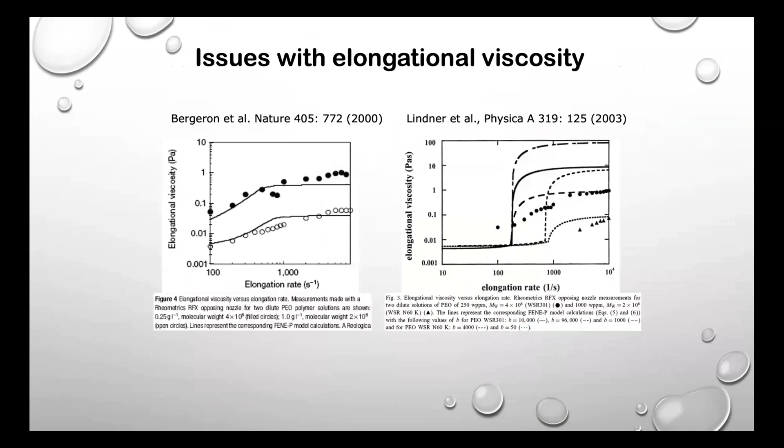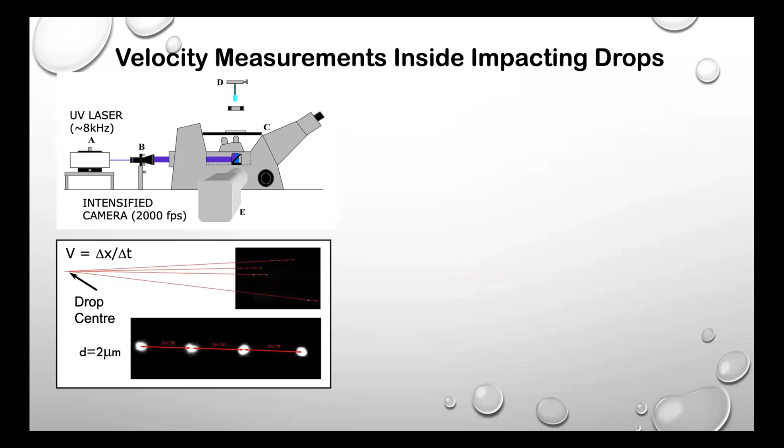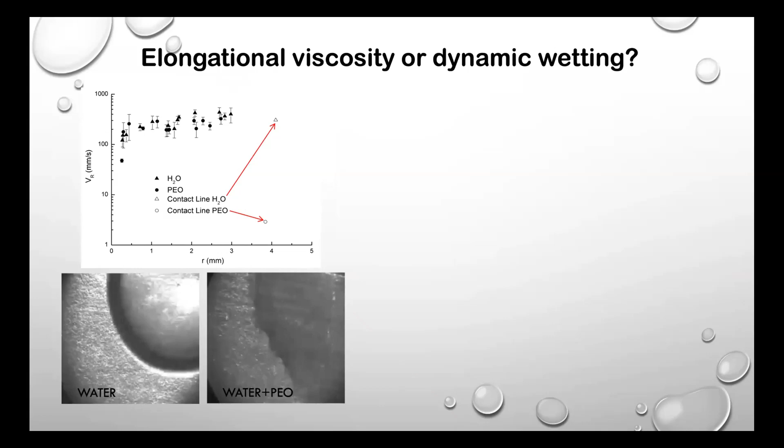Actually, one is about the phenomenon you showed before, related to viscoelastic recoil, that basically the wetting. Yes, correct. In this case, I mean, a modeling approach would be to model the fluid, as you mentioned also before, as a viscoelastic fluid with a certain extensibility and so on. But would polymer interaction, so the interaction between polymer chains, eventually affect this phenomenon, and that would not be captured in the model, right?

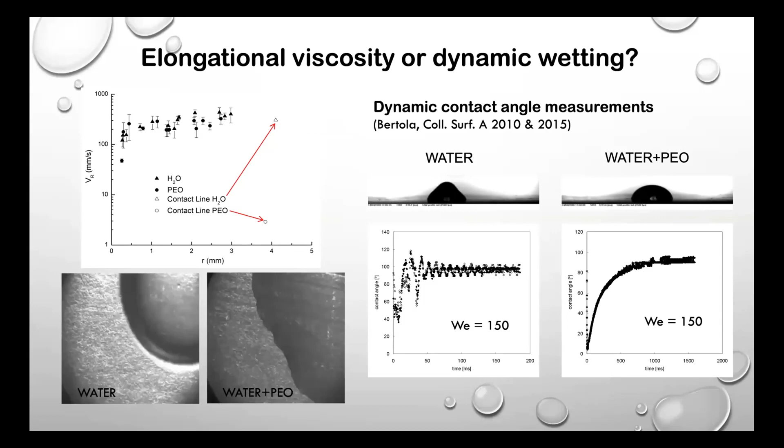I answered the first question. The first answer is no, because we are in the dilute regime. So in the dilute regime, molecules do not overlap, meaning that the average distance between two molecules is much larger than the radius of gyration of the molecule. So they are far away. Like, I say something very inappropriate, like an ideal gas. They're far away, and the concentration is very much below the overlap concentration. So they do not even get very close. In fact, we can really talk about individual molecules in a solvent.

But the problem is, how do you model this? Yeah, exactly, that was my point. No, I think there you have to go down to mesoscopic modeling. Yeah, because you don't have anymore the hypothesis of dilute solution in this case.

That's another thing. How do you know, or how can you verify experimentally whether in the corner near the contact line your actual local concentration remains the same as the bulk drop, or changes? Yeah, because you have the receding contact line. So if you imagine someone sweeping a room, all the rubbish accumulates near the sweeping broom. Yes, and so I guess that the polymer molecules accumulate near the contact line. And that's why you have this strange effect that would not be there in a dilute solution, because in a dilute solution you cannot make the bead on a string experiment. Yes. Okay, thank you.